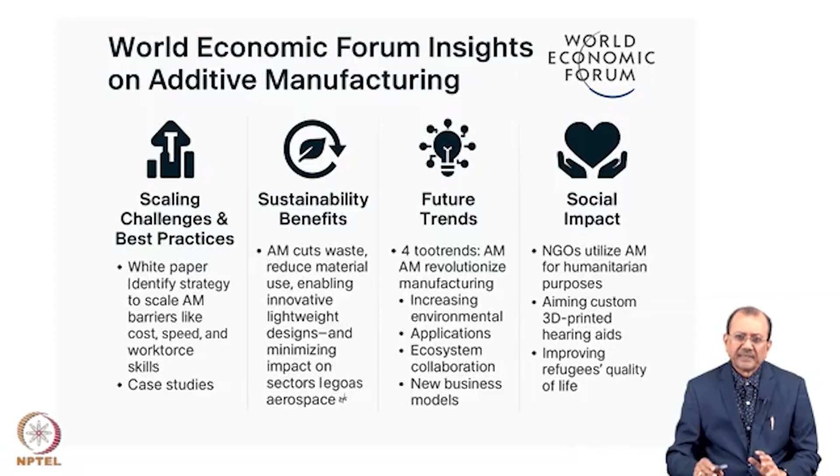So if we'd like to define 3D and additive manufacturing, it is basically the construction of three-dimensional objects from a CAD model, computer-aided design model, or a digital 3D model. The term 3D printing can refer to a variety of processes in which material is deposited, joined, and solidified under computer control to create a three-dimensional object, with material being added together—such as plastic, liquids, powder grains being fused together—typically layer by layer.

I'd like to establish an analogy, a comparison of 3D with the printing industry. If you ever visit a paper factory, you will find that paper is being manufactured by putting layers and layers, layer after layer.

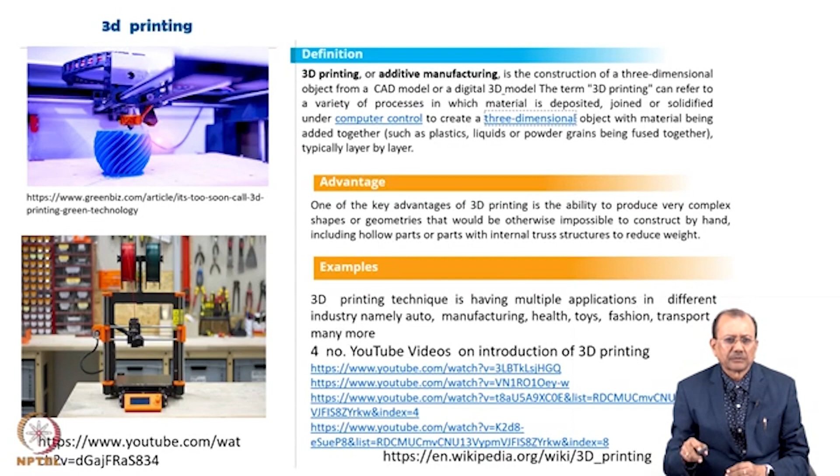So this video I have played. Now, if you see, this process is a very simple process, which was, I will say, the beginning of 3D printing when it started—it's not even FDM. Commonly, when we want to design, say we want to design this cup, we want to print or make this cup, first a 3D model of this cup is made on the computer.

There's CAD design. Then with the help of software, it is converted into an .stl file, because .stl is a file which 3D software running on the 3D printer can understand. The CAD software itself may not understand it, but there is conversion software which converts the 3D CAD model into an .stl file, and this .stl file becomes the input for the slicing software.

Slicing software means, as you have seen in the printer, it works by making slices, one after another. So this is the slicing software's function. STL is the input to the slicing software, and the slicing software directs the hardware machine, which puts layer after layer and makes the 3D object which you are seeing in the picture. So this is the way 3D printing works.

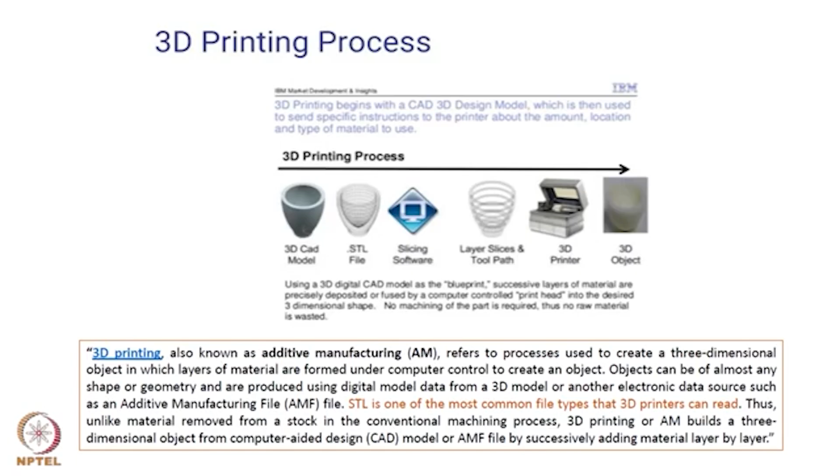This is a very simple flow which I am showing over here, but when you go for actual practicals, probably you will have to add some more steps. So this is what I thought worth understanding and worth knowing about the key processes in 3D printing.

Now I will give a little more insight about 3D printing. First of all, 3D objects can be made of plastic material, metal material, ceramic material, concrete material, and even many more kinds of materials can be used for three-dimensional designs. But for every material we will have a different kind of 3D machine.

So why is 3D printing such a big deal? You have seen it really is big. In normal design, there are some limitations. When we want to do the design, we have to create a mold, and we have to do prototyping, testing, and retesting.

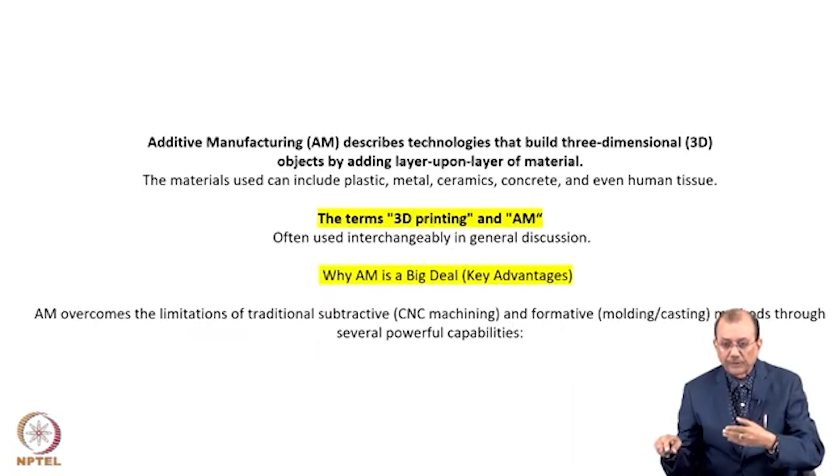While in case of 3D printing, as long as your object has been converted into a CAD drawing, there is a good chance that the final product with the help of 3D printing will be a good product. Many times companies are using 3D printers for prototyping. They want to see how their product will look before they go for commercial production, by creating it with the help of additive manufacturing. So at that time it is quite useful.

If we go step by step, the overall concept is that first of all, additive manufacturing can be used for any kind of shape. You will see, to your surprise, even today homes are being made with the help of 3D printing technologies. A home which used to take say one year's time can now be made in one month's time. In our country also, a lot of experiments are going on in the civil side as well.

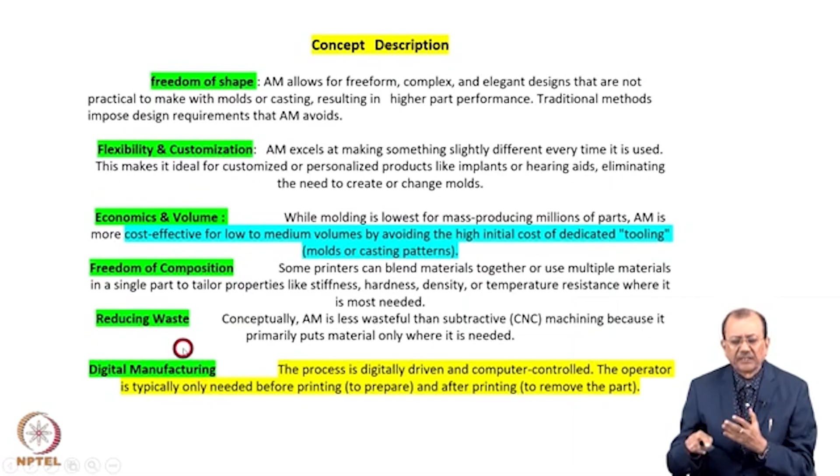It is quite flexible in terms of customization. It is economical, because when you want to create a design, it normally involves so many experts, but here for making a 3D design or 3D object, you need an expert to develop that model on the computer in CAD, and once that is made, then comes the question of translating that CAD drawing into the object with the help of a suitable 3D printer. This is again one of the key aspects of digital manufacturing, which we will be learning in subsequent courses — 3D additive manufacturing is a part of digital manufacturing.

3D printing is about what, when, and where. The 'what' you have already seen. 'When' means, suppose there is a breakdown in a factory and the spare part is not available in our country, it has to be imported. But if we have the drawing of the spare part, we know the material being used to make it, and we have a suitable 3D printer — because for every kind of work we need a suitable 3D printer — then it is quite possible that you can make that object with the help of a 3D printer.

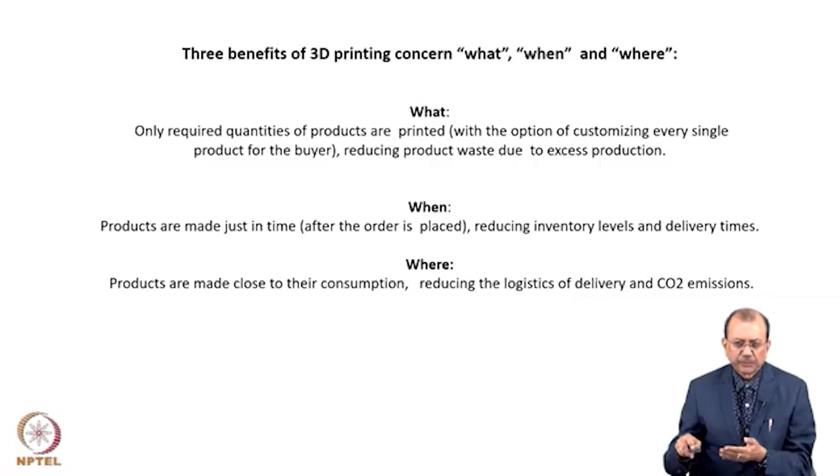So sometimes in case of emergency, it is quite viable to make a 3D object with the help of a 3D printer. Products are made close to their consumption, reducing the logistics of delivery and CO2 emissions, because you need not set up a factory for the production of that product. So it is also environmentally friendly.

There are many examples you would like to see, the world is full of examples. This implementation, as I said, has become a commonly used technology nowadays.

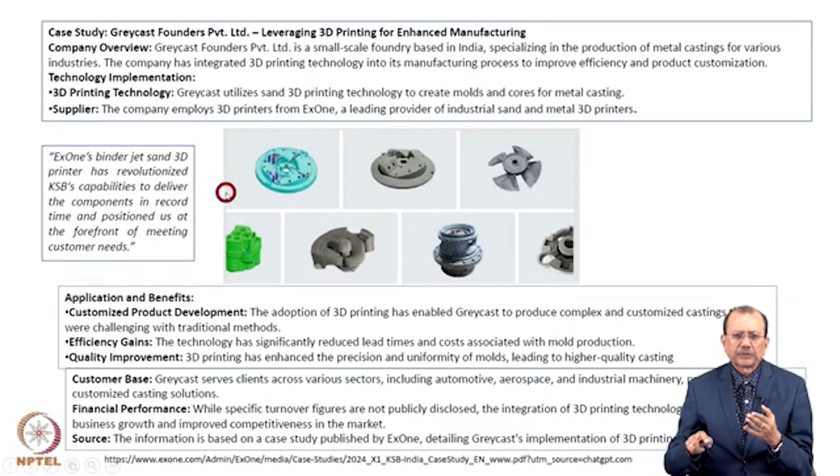One example is a company in our country called Greycast Founders Private Limited. They are using 3D printing for enhancing manufacturing. They keep getting requests for different kinds of molds, which, if they start developing conventionally, would take a lot of time. But with the help of 3D printing, the concept I explained, they are able to make these molds and designs in a very little time, say two weeks to a month, otherwise it may take much more time. So this is one example, and the site is given here, you can explore what all work they are doing. This is a very great example.

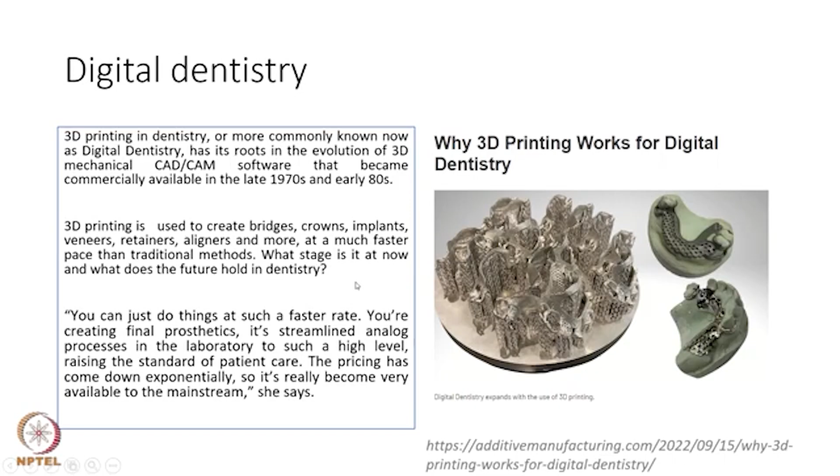In IIT Bombay, I know of a 3D printer lab. They have a 3D printer for printing bones, and this lab is in great demand by hospitals all over India. Whenever there is a demand for a bone that has been crushed, and you like to reform that bone, it may take much more time conventionally, and it may not be so accurate. But once we have a 3D kind of X-ray of that bone, it is printed in the 3D printer in this lab. I have seen this myself. So this is a great example of 3D printing helping mankind, even in the health sector.

This is one of the slides I captured from McKinsey, showing how 3D printing is helping in the formation of medical devices. One can see it has use in the pharmaceutical industry as well as the medical device industry, surgical guides, prosthetic implants. Implants are very common using 3D printing nowadays, as I said, tooth implants, it is very common.

And now there is also the advantage of printing heart valves with the help of 3D printing. They are very precise, and depending upon the requirement of an individual, the valves are printed. Even for personalized drugs, 3D printing is used, because as we discussed earlier, the inputs for 3D printing are also liquids and other materials. So personalized drugs are also being attempted for some diseases, where general drugs are not working or may be too much for a patient.

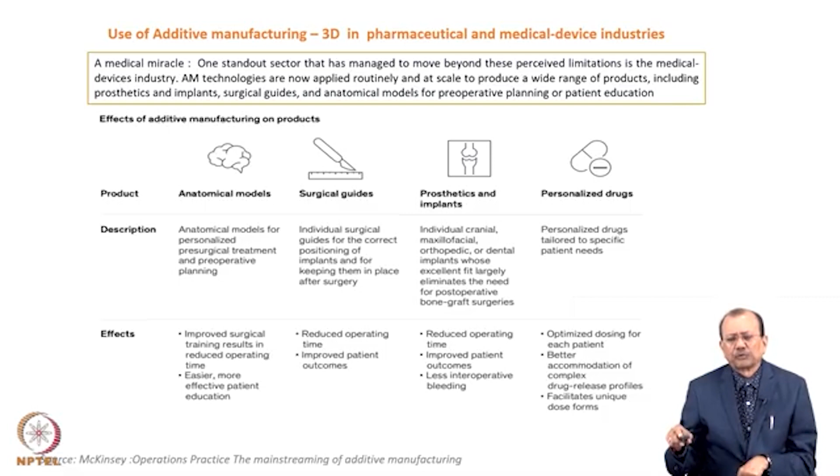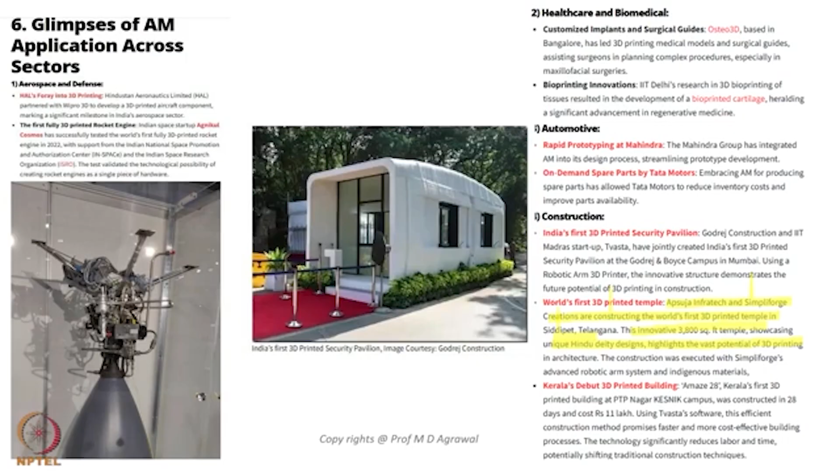So there are many examples. This is another example, making homes. A glimpse of additive manufacturing across many sectors, automobile sectors and all these sectors. You can like to listen to this video at leisure.

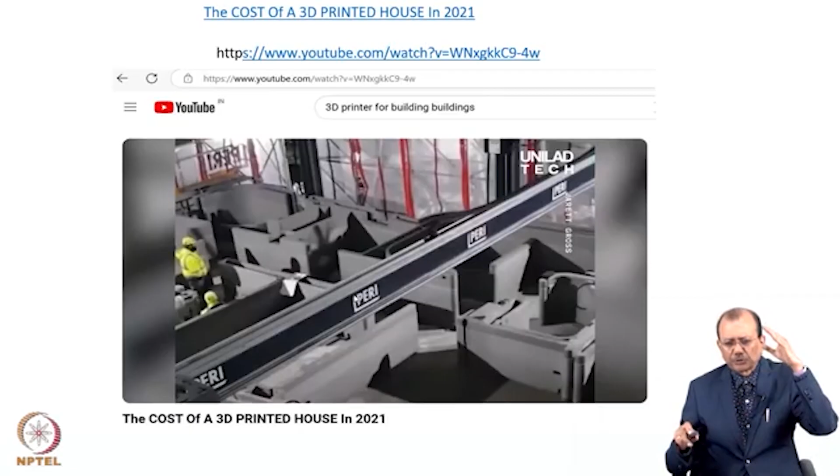Then there's how 3D printing is helping to build houses. In China, this industry is very common, 3D printing is being used for manufacturing bungalows and multi-story buildings also. So this is another example of 3D printing, how it's being used to build a house. You can play this video and understand yourself how 3D printing is being used in building a house.

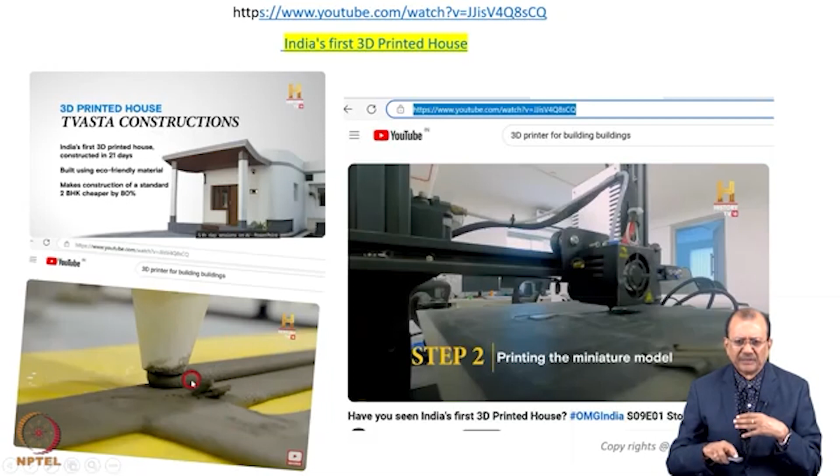The raw material commonly used for building these houses is a mix of cement and other concrete materials. This is processed and used as the input.

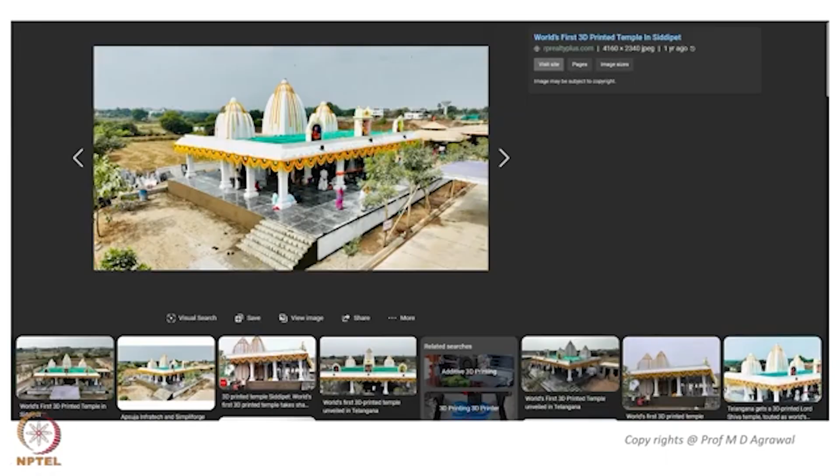This requires a different kind of specialized 3D printer. This temple has been made with the help of 3D printing at a place called Siddipet, somewhere in Telangana, using a 3D printer only.

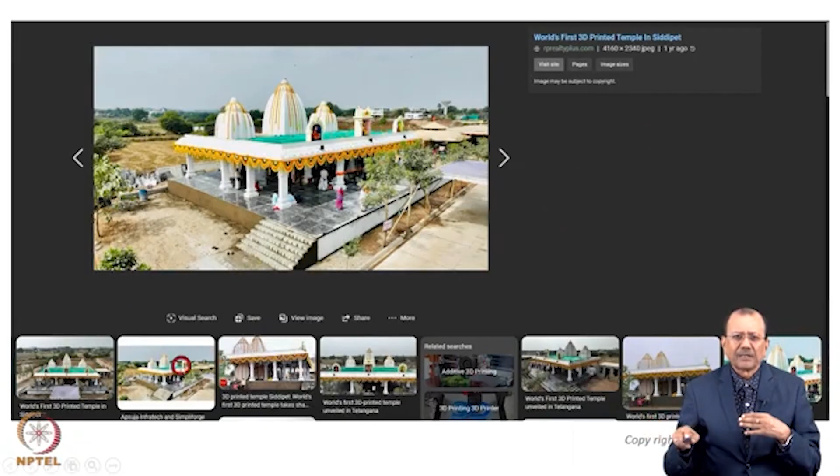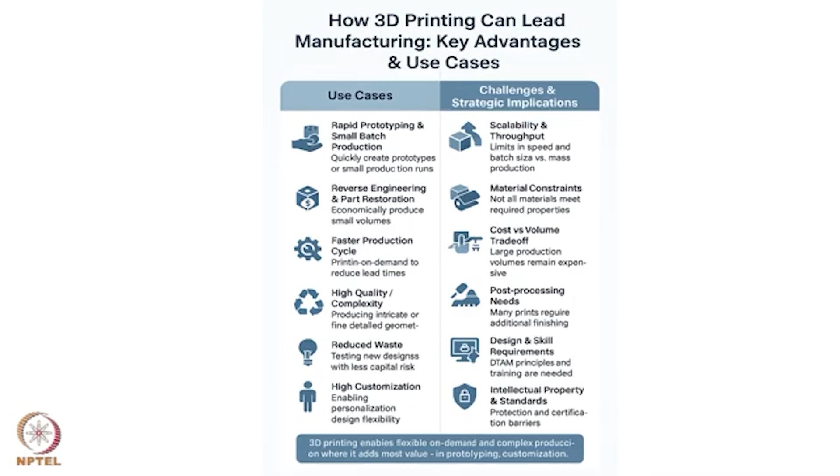Now let's summarize how 3D printing is helping manufacturing. These slides give some insight on that. There are hundreds of use cases, some of which you will learn in the next session, next week. But here I have given a few use cases.

One of the very common uses of 3D printing is prototyping, which we discussed. Then there's reverse engineering, where you want to make some part or machine yourself and see how it functions. 3D printing can be used for that.

Challenges and strategic implications are many. First of all, you require design and skill requirements. In case of 3D printing, there is an advantage: you may not require highly skilled manpower. As long as you have a technician who understands 3D printing functioning, or you can make that CAD drawing, you will be able to manufacture your 3D object. So the requirement of very high skilled labor may not be so much needed.

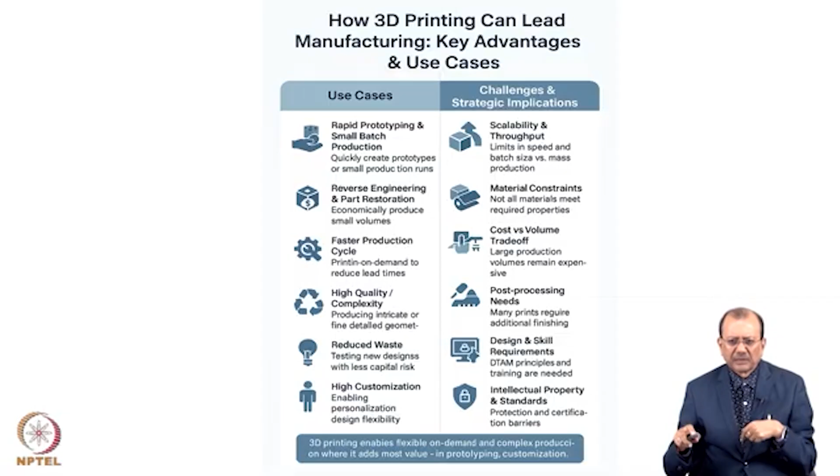Secondly, material constraint is one limitation in case of 3D printing. You may not get a suitable material or input which can be used for building the 3D printed objects, because it depends upon which material the 3D printing machine can make use of. The commonly used materials in many cases are plastic wires or steel wires, which are used as input, and then the machine and arm function based on that.

There are many advantages for medium and small industries to learn about this. There is one company called Aurum 3D. If you visit their website, they are working very closely with many MSMEs, because MSMEs have constraints in terms of

production volume. So, in fact, this is becoming one of the important industries itself, if somebody wants to start a business as a 3D printing business or additive manufacturing business. Many individuals and companies are doing that business itself.

So these are the companies - I have given some indicative examples. Divine 3D is one company, then JGroup Robotics is a second company, and third is Aurum 3D. They have different types of 3D printers, and they are helping many industry sectors for 3D printing objects.

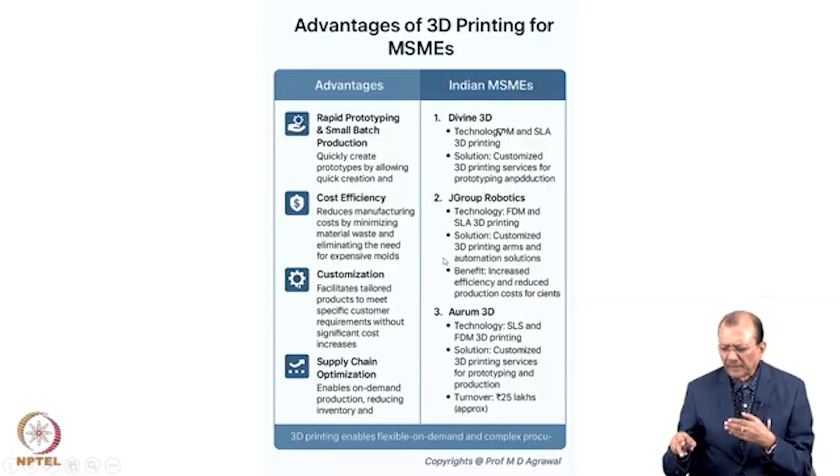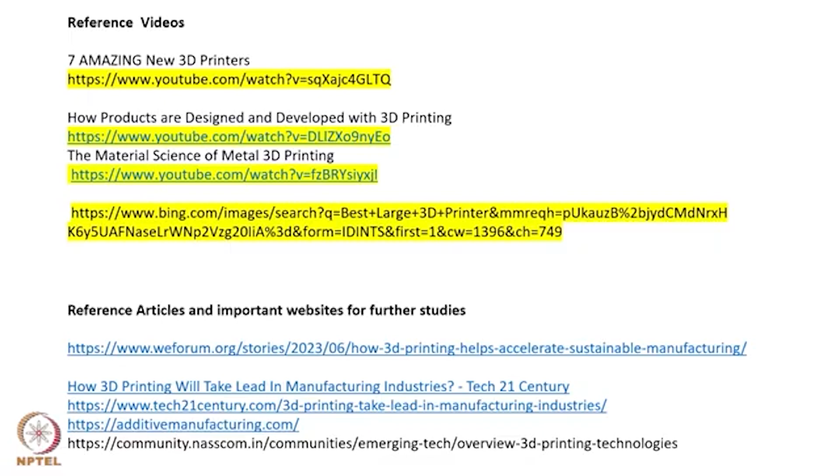So with this, I would like to conclude that 3D printing is one technology which is quite versatile for manufacturing as well as beyond manufacturing. We have seen that 3D printing is used in the health industry also.

So I will now invite learners and students to try to study this area a little more in depth. The purpose of this session was an overview, which I hope has helped you understand some common uses of 3D printing and how it functions. Thank you very much.